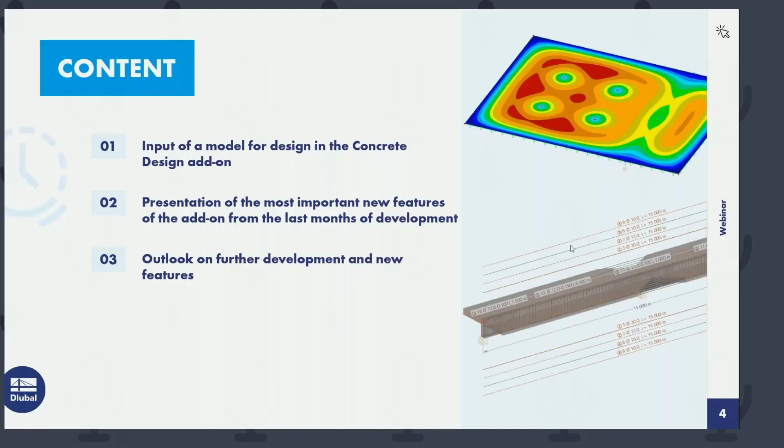Okay, thanks Andreas for the introduction. I will start with a short overview about the content of today's presentation. As I already mentioned, I will show you today new features in our concrete design add-on. Therefore, I will create a small structure in RFEM 6, and during the modeling process, I will tell you all the new features which we now have in our concrete design add-on.

Just a short overview about these new features. Mainly it's the automatic function for surface reinforcement. Then we have also a new function regarding determination of required reinforcement for members, which now includes serviceability limit state design. Then I will show you how to design with member representatives. We also have a new multi-edit option in the edit member dialog for members and member sets.

If we have entered a reinforcement and have a certain reinforcement layout inside our member, then we have a new function for printing graphics of this reinforcement template or proposal into the printout report. I will show this to you as well. And I will show you how to activate the design check for the shear joint in the add-on.

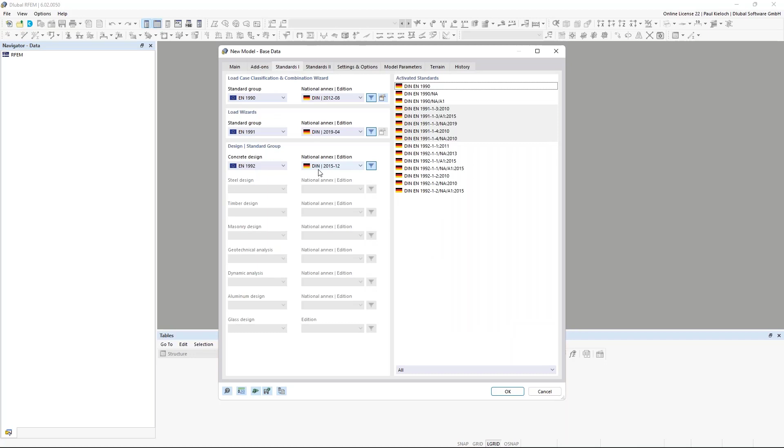What I would like to do today is start with a template. That has the benefit that there are some settings already stored in the template, and add-ons can be activated, or I could predefine national annexes and so on. So this is already set in this template, and I would give it the name 'webinar', and maybe 'English', so that's the English one. And I'll start this file here.

And as mentioned, due to the fact that I've used these templates, I have here a certain amount of materials, sections, thicknesses, and so on. And I will use them today for this presentation.

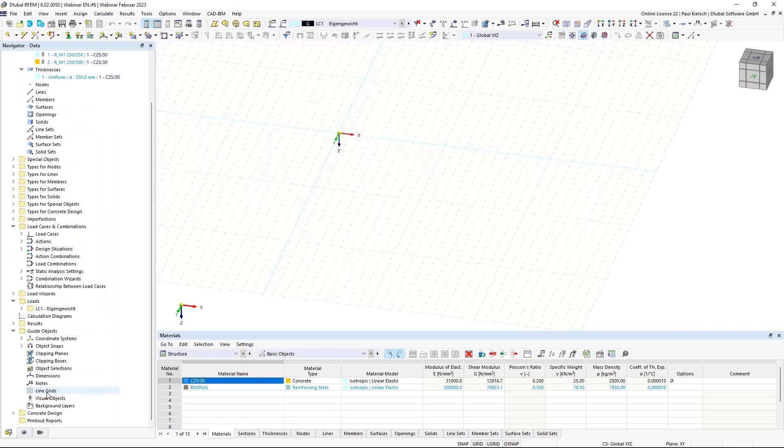So at first, I'm switching here to these guide objects, and there I will create a new line grid. And I will show you today also the labels here and the dimensions. Switch here over and enter the dimensions in X direction. In X direction, 5 meters and 4 spans. So it looks like this.

And in Y direction, the first span with 5 meters. Then I have 2.5 meters and 2 spans. And the last one is again 5 meters. So this is my line grid, which I would like to use today. It looks like this. And on this line grid, I will create my slab and my beams and columns and so on. So I can switch off the grid in the background, and then it's a little bit cleaner if you just see the line grids.

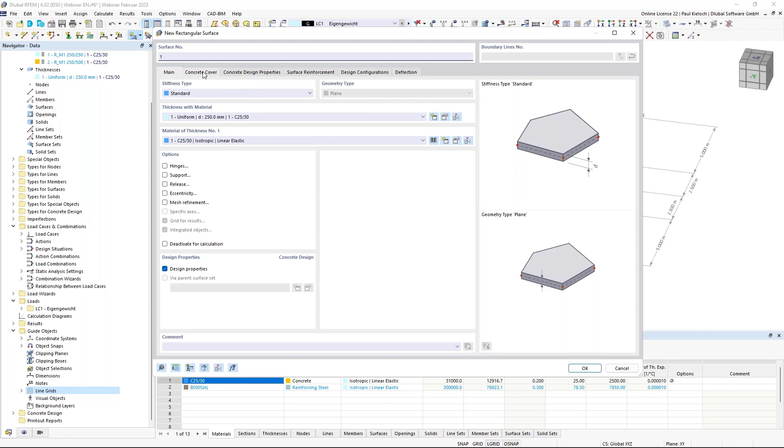Okay, the first topic is entering a surface for design. So I'm creating here a concrete surface with the thickness of 250 millimeter and this concrete here. And before I'm entering this surface, I can directly set the design properties for this slab. So concrete cover and the concrete durability class, I leave it as it is by default here in this example, XC1. The reinforcement direction is also default.

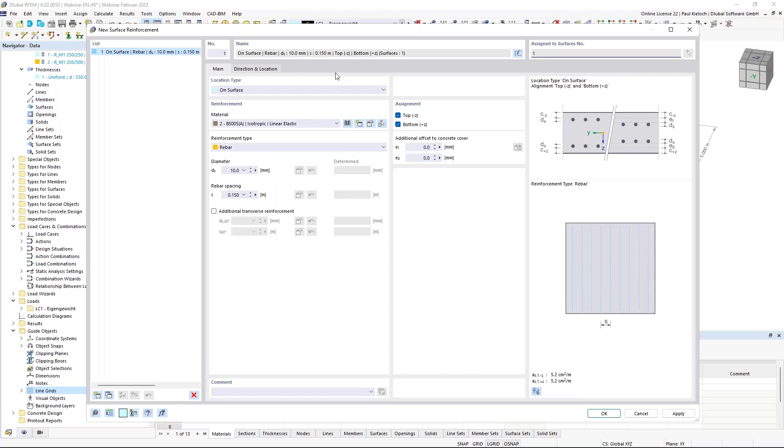And I will assign here a basic reinforcement for the whole slab with a diameter of 10 millimeter and a spacing of 15 centimeters in both directions. You see here already some changes in this dialog, and I will come back to these changes and modifications of this dialog in this latest version of RFEM 6 later after the first calculation. Okay, I can confirm this.

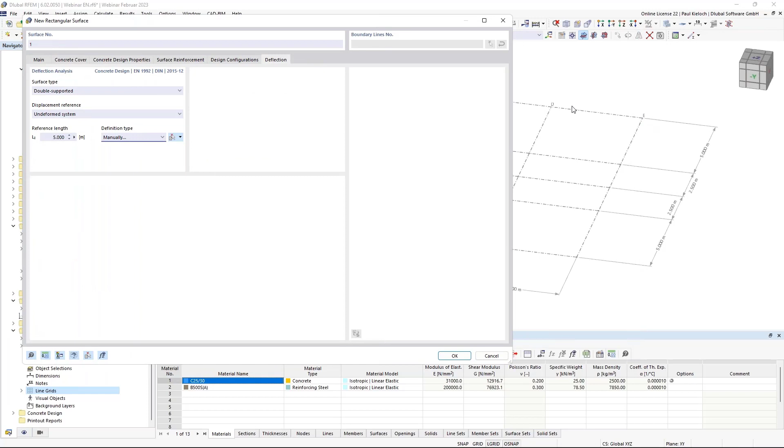The design configurations, I leave them also by default for this first attempt here, and I will also come back later to these design configurations. The last thing I'm changing here is the reference length for the deflection analysis. So I switch this to manually, and the reference length is now set to 5 meters. So I have 5 meters in X and Y direction, and I switch this manually to 5 meters. Confirm with OK, and then I create here my slab.

So by default, you see here also the rendering of the assigned reinforcement mesh. And what's new now in RFEM in the latest version is the description of the assigned reinforcement. In the latest version, we changed it a little bit. In the previous versions, there was a small arrow downwards and upwards. And if the arrow was downwards, then it was the reinforcement on the bottom side. And if it was upwards, then it was the reinforcement on the top side of the slab.

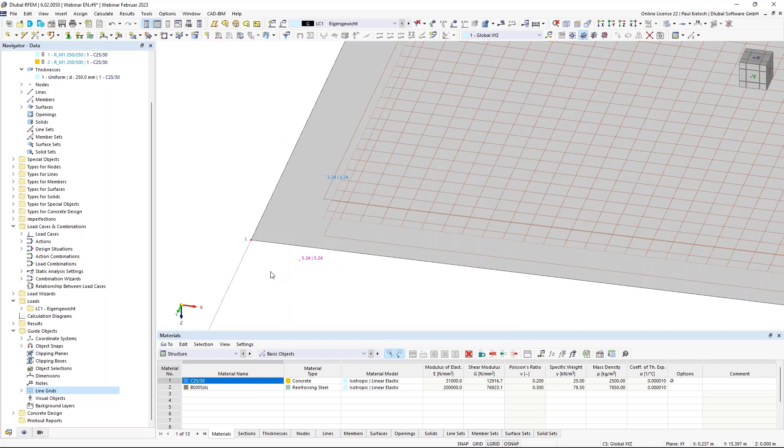That was now changed a little bit, and it's just a small line next to the text on the downside or on the upper side. So it's a small change here. What I would like to change is the number of decimal places for this example. Okay, and now I'm switching off this reinforcement just to have a cleaner look on the structure.

Okay, perfect. So the next topic is that I would like to enter a beam here or a rib member in this axis D. Therefore, I create a new member, switch the type here to rib, and I'm assigning this eccentric cross section on the positive Z side of the surface. That's a setting by default. And the used section should be this 250 by 500 millimeter section. Can confirm that, it is okay.

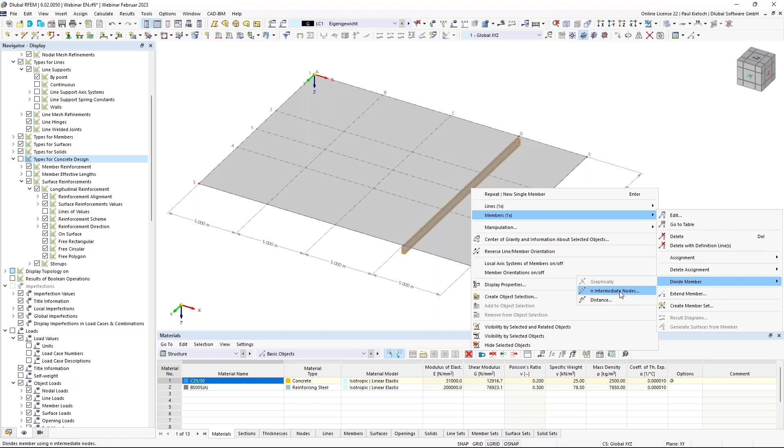And then I will assign this rib here in this axis. And here in axis 3, in this point in the middle of the beam, I would like to support this beam with a column, and therefore I'm dividing this member by one intermediate node. But what's new in RFEM 6 is that we can use this node type on member, and that has the benefit that our member is not divided in two parts, and that makes it a little bit easier for definition of reinforcement and so on.

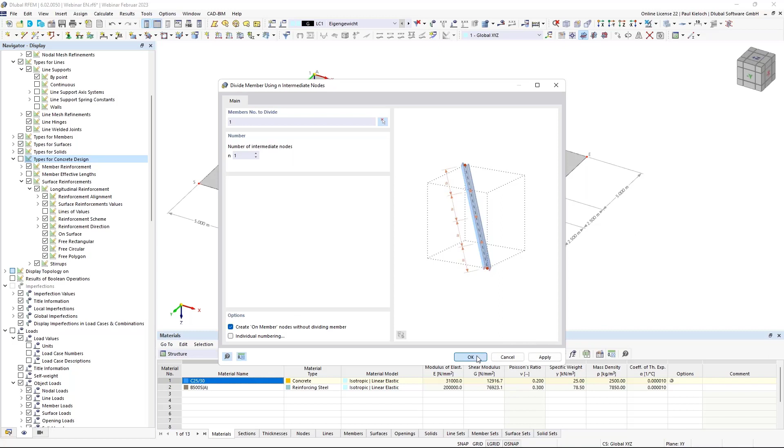So I will create a new node just with the type on member without dividing the member. Okay. And you see this here in the middle of the beam with a light blue node, and that's the new type for dividing members. Okay, the next step I would like to do is entering nodes for the column heads. So they are here in these points.

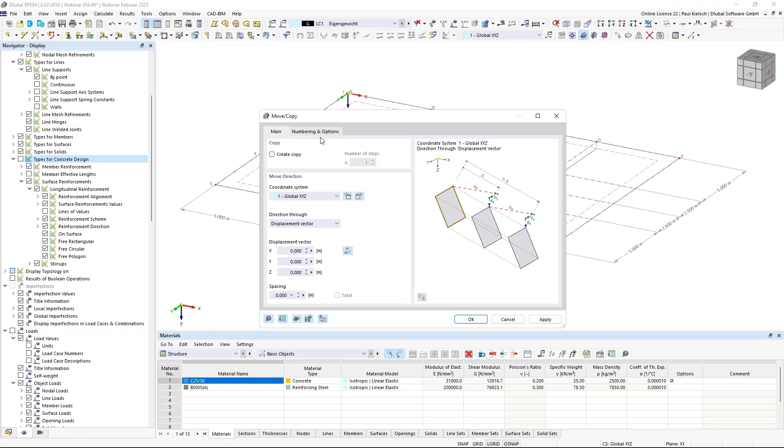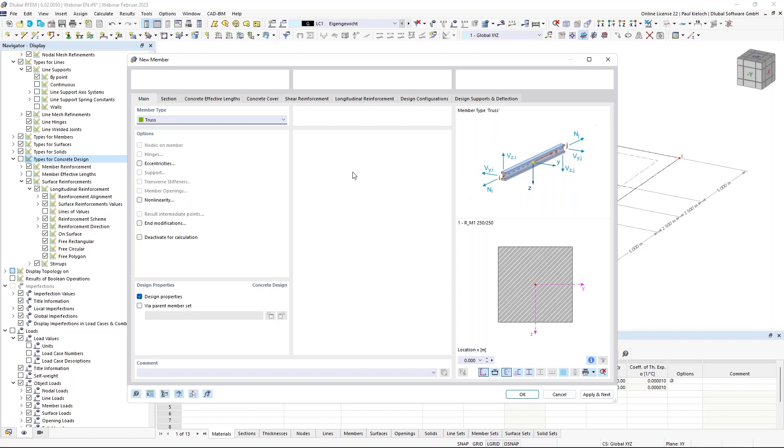Okay, and now I'm switching to the wireframe display model, and I can select these 5 nodes here, and then I will copy them with 3 meters in Z direction, and I can link these steps here and enter automatically a new member. Therefore, I will create a template. The columns should be hinged at the top end and the bottom end. So I'm switching here the member type to truss. The section is pre-selected in this case, like I would like also to use it, with 250 by 250 millimeters.

And I can now go through all the settings, all these design properties here, and entering, for example, the buckling lengths for the stability analysis. And in my example, it's a braced system. And I would like to use these effective length factors of 1 in both directions. Okay, next step would be the concrete covering. I leave it here in this example like it is.

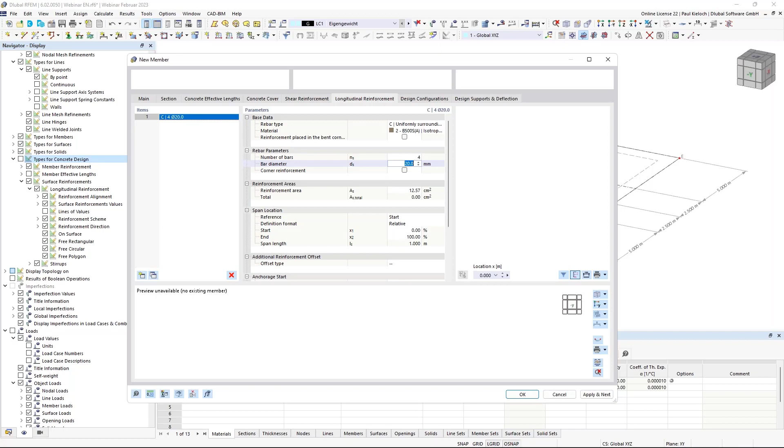Regarding the shear force, I would like to use shear links with a thickness or diameter of 10 millimeters and a spacing of 15 centimeters. And the longitudinal reinforcement should be uniform surrounding, 4 rebars and a diameter of 20 millimeters. Okay. Design configuration and design supports are not required to change here in this case. So I can confirm this. And then I'm using the template to create my columns. And they would look like this.

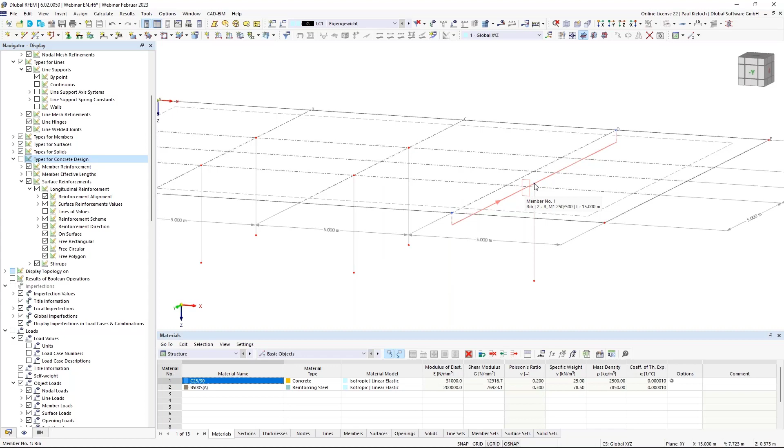I have just to take care because this node is here in the center of this eccentric beam. So the nodes at the bottom end are not in the same height. I will just do a double click here on this node and switch this to 3 meters. And then we have the same level here.

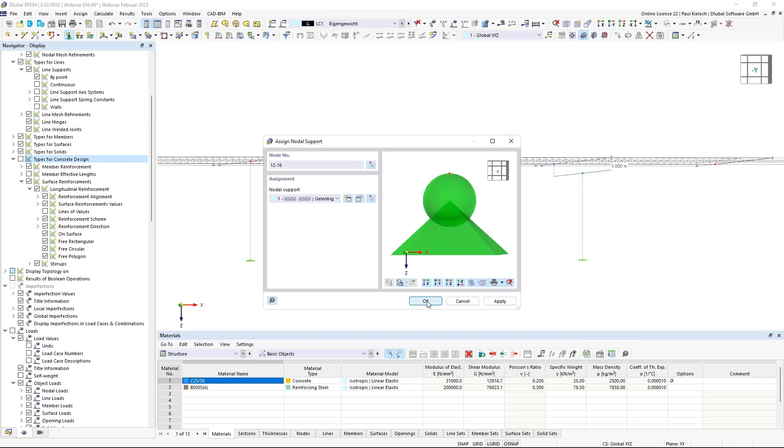Okay, then I can create the supports for these columns. Due to the fact that I have hinged member ends by this member type, I can create a new nodal support, and this is fixed or rigid in all directions. That would look like this in this example.

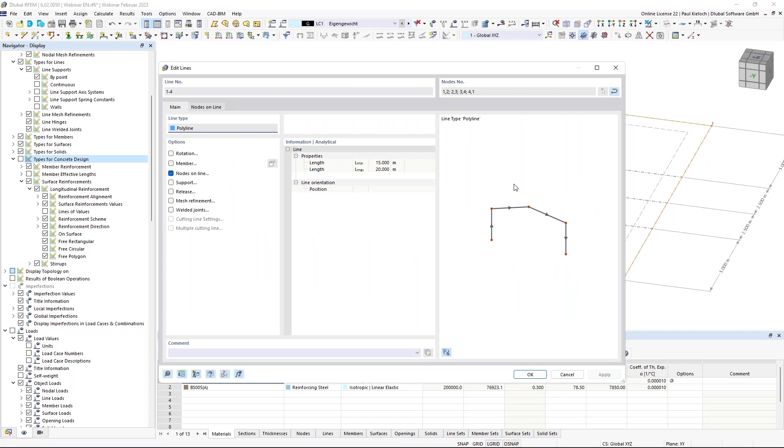Okay, then the next topic would be entering the support at the edge of the slab. So there I would like to consider walls. Therefore, we have also an option in RFEM 6, so I can select all the lines at the edge of the slab, opening them with a double click, and I will assign there a support, create a new one for them, and this one will be changed to local. And as soon as I switch this to local, I'm getting here a new option, stiffness via a fictive wall.

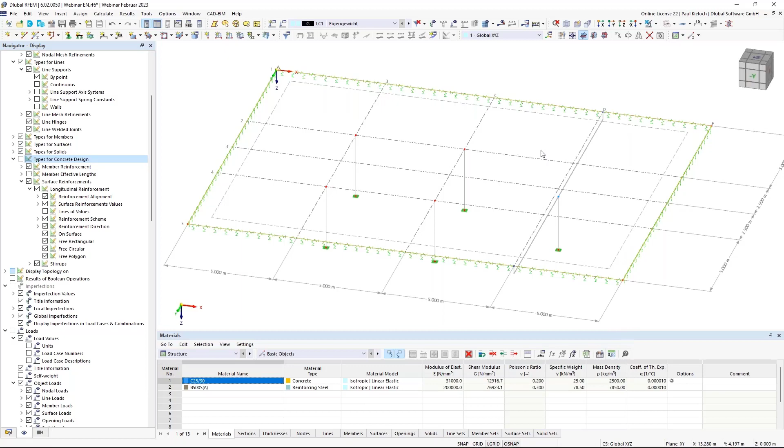And the wall thickness should be 25 centimeters and a height of 3 meters. And it is hinged at the wall head and base. So that's okay for me. Can confirm this. And then I have also the lines on the edge of the slab supported.

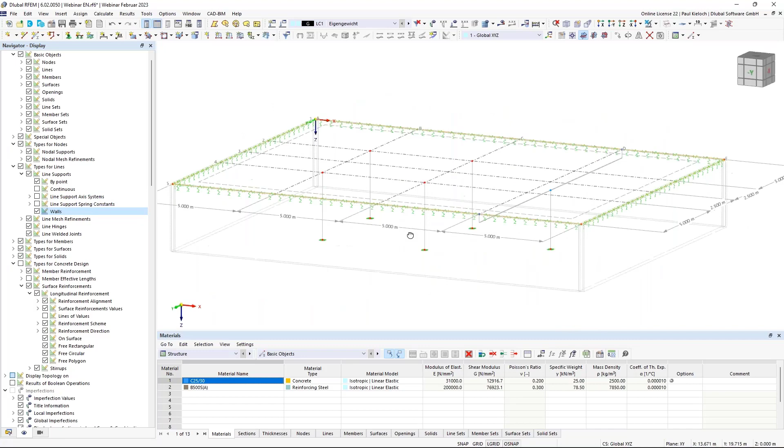If I would like to check this graphically in my system, then I can switch to the view or display navigator. And there under the line supports, I have the option to activate the walls. And then I would see the system also with these fictive walls here. Okay. That is basically my system now.

What I have not defined yet is the settings regarding the rib. Therefore, I'm opening the rib member once again. And I switch to this tab here with the rib. And in this table, you can basically assign the segment length for the determination of the effective width for the ribs. I will not go too much into detail for this part. We have shown this in our first webinar regarding concrete design in November 2021. And it's also part of the Eurocode 2 training where we get more into detail regarding this table.

I will just enter the values here to have a realistic effective width for this example. I'm using here this approach according to Eurocode 2. So I'm setting the segments here. Okay. Eurocode 2. Then, okay. User defined. It's the same on the other side. Basically, I have to do this because I'm using one member which is supported in the middle, and therefore the program needs the reference length. Okay.

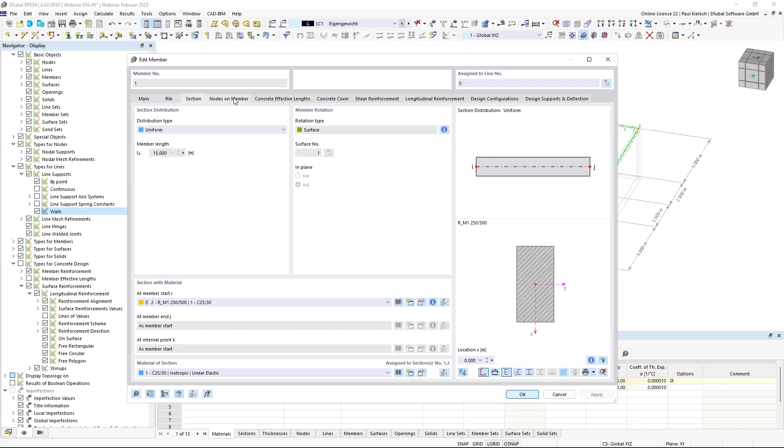So next is the section tab. There I do not have to do any changes. This is okay so far. Concrete covering also. So I can directly switch to the shear reinforcement. I would like to use here shear links, stirrups with a diameter of 10 millimeters and a spacing of 0.15 meters. And I will not use this for the whole length of the member, but I would like to have a span in the middle of the beam where I have 10 centimeter spacing between the stirrups.

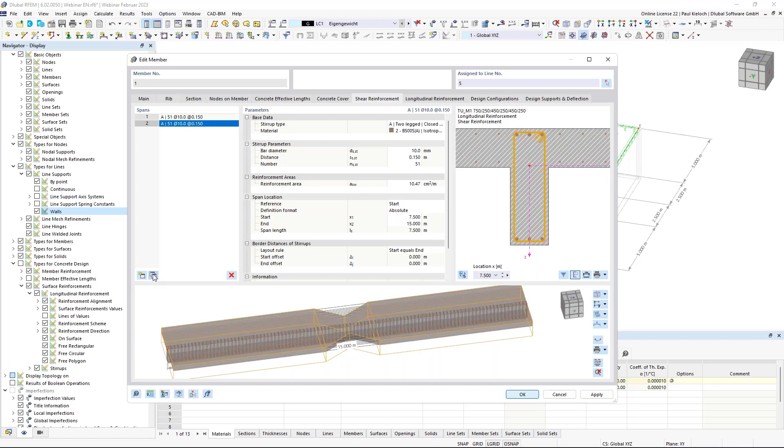So therefore I'm creating new spans. First switch here to absolute for the definition of the span length. Then I just click two times on this button. And then I'm getting these spans. If I zoom in a little bit, then you see that this middle span is now a little bit displaced and not in the middle of the member.

And I can change this here to 6 meters, and the second X location to 9 meters in my example. And then the span is in the middle of the beam. And I can change this to 0.1 meters or 10 centimeter spacing. Okay, that's my shear reinforcement I would like to use today. And then I'm switching to the longitudinal reinforcement.

By default, the reinforcement is using 3 rebars at the top side and on the bottom side. I will change it to 4 rebars. And then you find also here the rebars from the surface reinforcement, which is automatically also assigned to the flanges of the rib member. If you do not want to assign this surface reinforcement here, then you can switch it off via this button, but I will leave it on for this example.

Last thing I would like to add is an additional reinforcement on the sides of the web. So therefore I'm creating a new item. And this one is a uniform surrounding for my example here. And 6 rebars with a diameter of 12 millimeters. And then I have to enter an offset from the stirrup. From the top side, it's 150 millimeters, and on the bottom side, also 150 millimeters. And then it looks like this. Then I would consider these 3 rebars on each side of the web for the reinforcement.

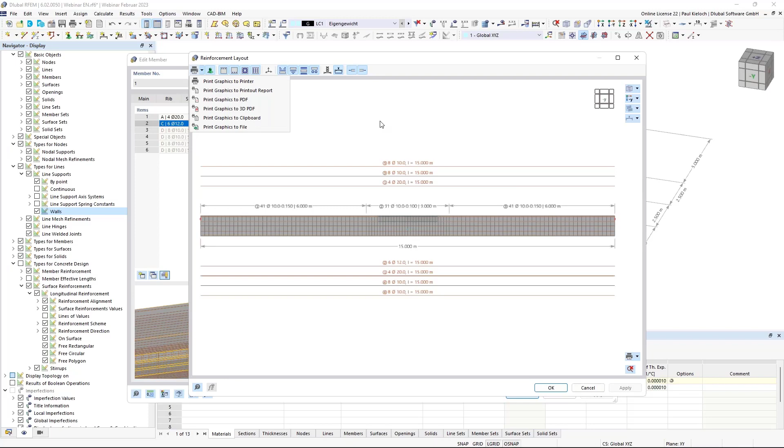Now, if you have entered the shear reinforcement or the longitudinal reinforcement like this, and you would like to print a graphic of this definition into the printout report, there is also a new feature. You can click on this button here, and then you get a new dialog called reinforcement layout. And in this dialog, we have a new button, a new function, and there you can print the graphic directly into, for example, the printout report or 3D PDF or a graphic as a file. So it's not a CAD file, it's a picture file. So you have this option, basically the same as for printing a regular graphic into the printout report. So that's also a new feature in the add-on.

Okay. Then I'm switching to the tab with the design configurations. There we have the ultimate configuration and the serviceability configuration. And in every configuration, we have one new feature. If I'm switching to the ultimate configuration, then you can see this shear joint, and that is what I have activated before in this tab with the rib.

So in general, the shear joint design check is always activated, and there you find further settings, for example, how the program determines the shear stress in the joint, or you can also activate design of flange connection on segmented cross section. So if you would like to perform these design checks, then you can check it on here in this ultimate configuration. So just keep in mind, this is always active, but you also have to take care whether you have activated the shear joint in the individual members.

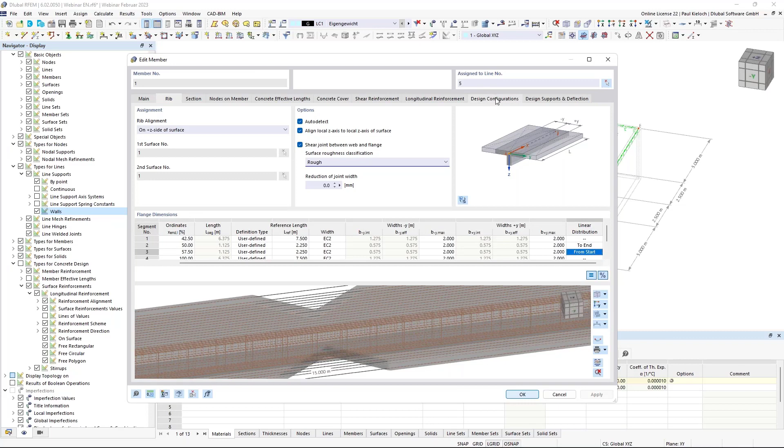The next new feature is inside the serviceability configuration. So inside the serviceability configuration for the members, you find a new option, determination of longitudinal reinforcement for members.

We have implemented this at the end of last year, and now it's possible, if you check this option, to consider also the parts from serviceability limit state in the result diagrams for the required reinforcement. In the older versions of RFEM 6, there was just the ultimate limit state considered in the diagrams for the required reinforcement. By activating these options, the diagram will also consider the parts from the serviceability limit state.

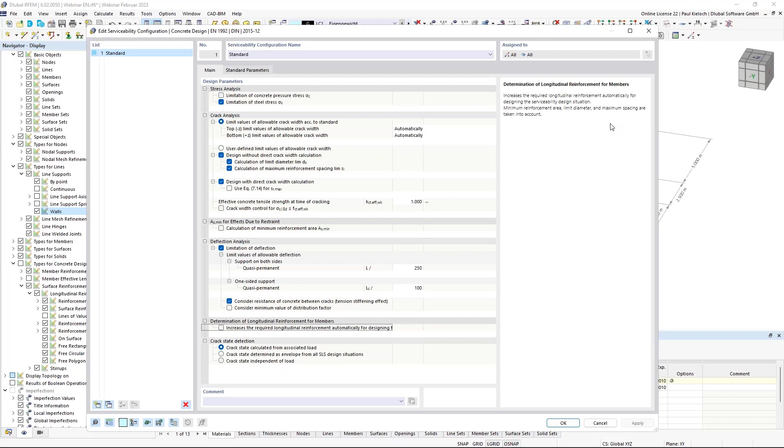If you click on this here, you get a little tooltip. There you see that currently this option considers the requirement for the minimum longitudinal reinforcement, the design check for the limit diameter, or the maximum spacing. The direct crack width calculation is currently not implemented. Okay. That's so far regarding the new features in the configurations.

One last topic I have to enter here is the design supports. In concrete design, we are checking the deflection in Z direction. So I'm switching over to the local Z axis. If I zoom out a little bit, you see that the member length is 15 meters. This dialog basically does not know that we have a column in the middle of the member. So the reference length would be by default the total member length, and for the deflection analysis that would not be okay in this case. So I have to enter design supports to consider this correctly.

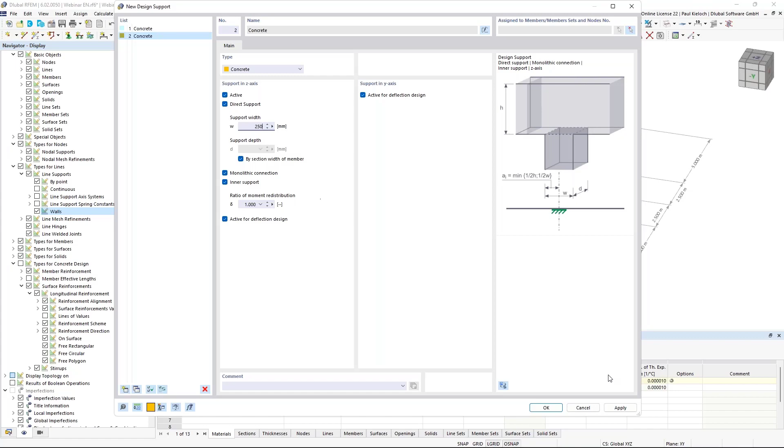I'm creating a new one, monolithical, with a width of 250 millimeters in my example. That will be assigned at the start and the end of the beam. And then we have also one here in the middle. That is an inner support, also 250. As soon as I have assigned these design supports to this internal node, you see that we have two spans, each with 7.5 meters. Okay.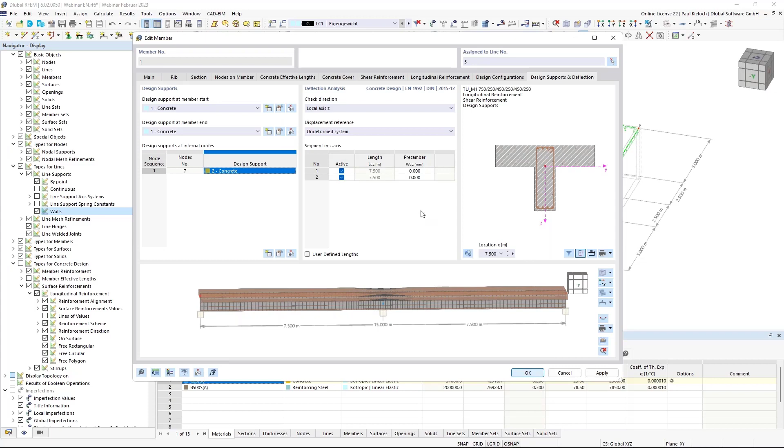We have defined our reinforcement for the member. The next topic I would like to enter with the structure is an FE mesh refinement. I would like to assign the FE mesh refinement on these nodes. So I'm selecting them, double click FE mesh refinement, and I create a new one that should be rectangle in my case, and I'm using an inner length of 7.5 centimeters.

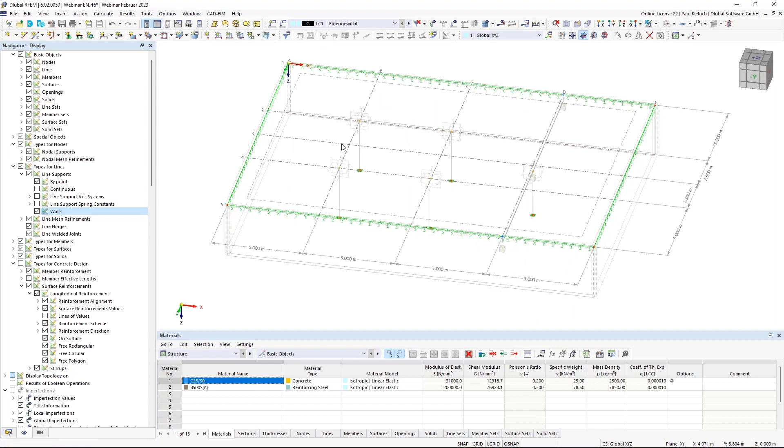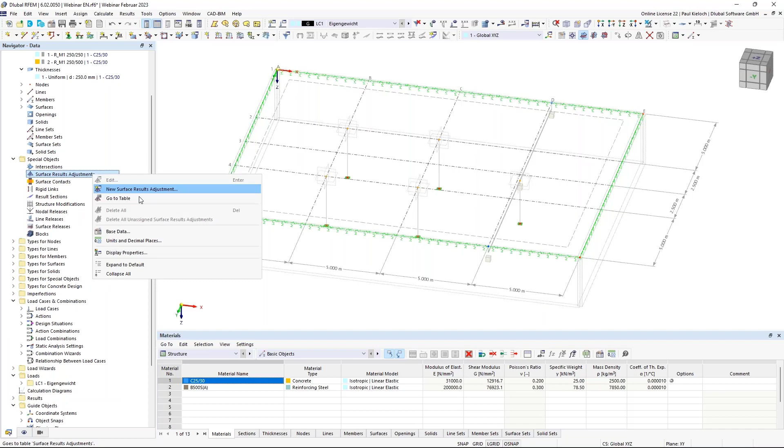Okay, so it looks like this, and now, if I have assigned a mesh refinement, I can also use in this situation a surface result adjustment to use average values of the surface internal forces. Therefore, I'm going to the special objects, and there you find the surface result adjustments. So I create a new one for surface 1. I will use dimensions in A and B direction with 0.75 meters, both directions.

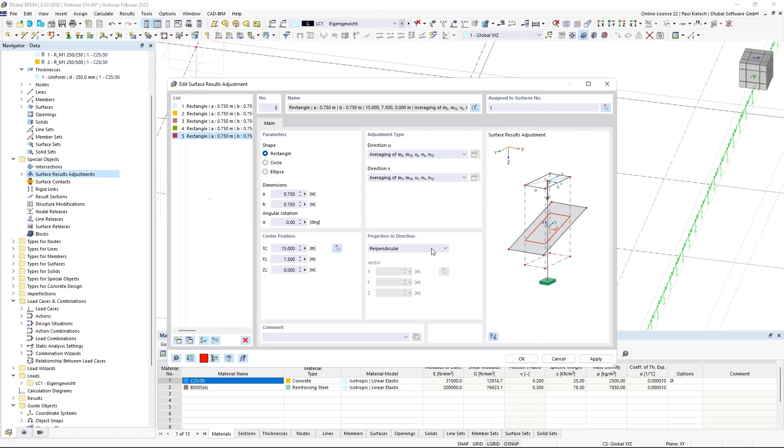With this button, I can set the first location. If I click on apply, I can show you where this is located now. I'm using this button for copying this assigned surface result adjustment. Then it's pretty easy to create them, just clicking on copy and switching the location. It goes like this. Here. Okay. And if I click on apply, you see them in my file.

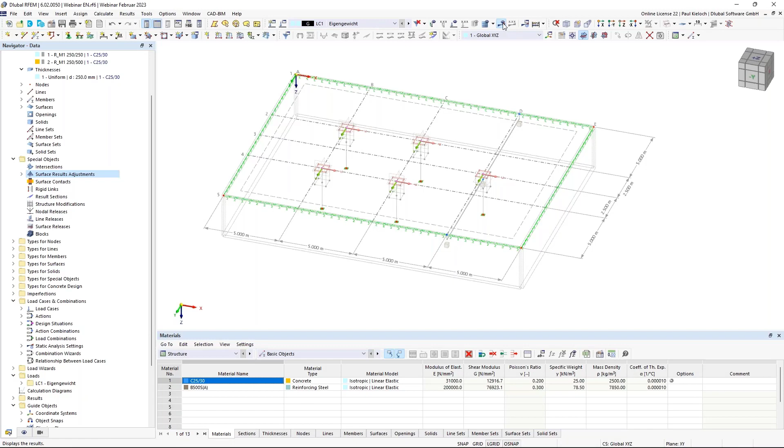The next step would be to enter the loading. Before I'm doing this, I just want to check whether my structure is correctly entered, whether there are maybe some problems regarding the FE mesh and so on. Therefore, I will calculate the first load case. And yeah, that looks okay. Everything seems to be connected properly. Now I can show you also, if I switch to the internal forces of the surfaces, how the surface result adjustments are working. So everything seems to work.

Now I can switch off the results and the FE mesh, and I can switch off the surface result adjustments, the result objects. I'm also switching off the type for nodes, the nodal mesh refinements, and then I have a cleaner look on the file. Okay. Now I can start with entering the load.

At first, I need some new load cases for this situation. My first load case will be the load case for the self-weight. I will call it just DL for dead load. Then I will create a new one, live load 1. I'm using this category. And I'm copying this. This one is live load 2, this one is live load 3, and this one is 4. Okay. Apply.

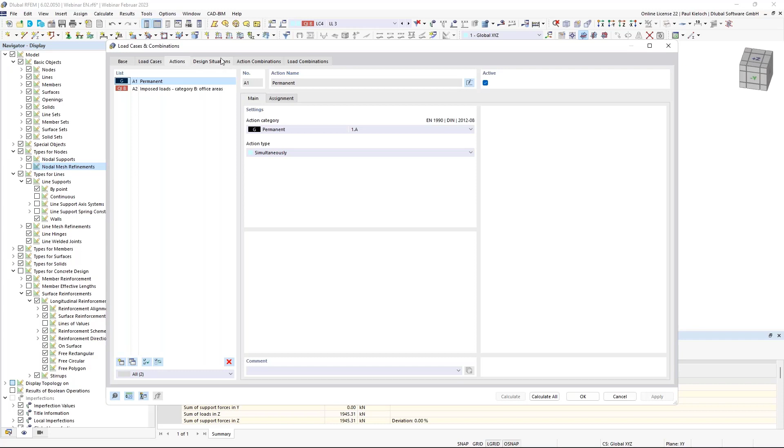The actions are okay in this example. I'm switching to the design situations. The design situation serviceability limit state frequent is not required here in my example, so I can delete this one, and I will do the design checks just with the characteristic and the quasi-permanent design situations.

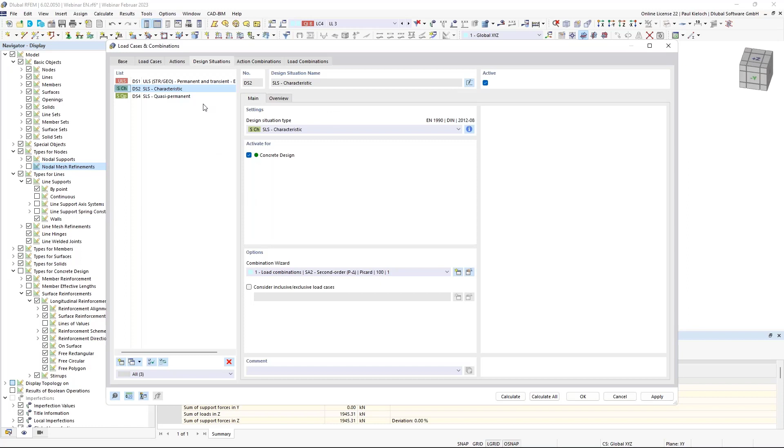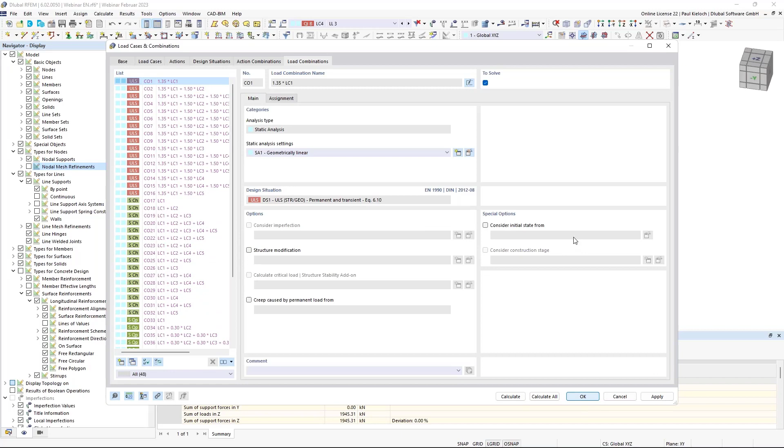One change is that I will create load combinations according to first order analysis, so I'm switching that here and switching to the action combinations, and then if I click on this tab, I will get the load combinations, and they are all according to first order analysis. Okay, those are my load combinations for this example, and now I can start filling these load cases with loads.

So the first load case, dead load, will have 1.5 kilonewton per square meter on surface number 1, and it looks like this.

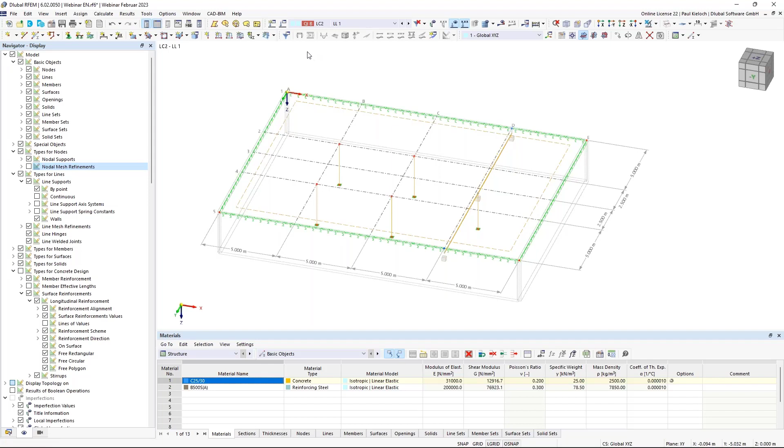Here in the second load case, it's now a little bit more problematic. For the live load, I would like to use a loading pattern according to this grid, to these fields here. Currently, we do not have a load wizard for this, so I will create the loading pattern by using surface loads, rectangular loads, and polygon loads. For this situation, I'm in my load case 2, and I will create a rectangular load on surface number 1.

The load value here in my example is 3.8 kilonewton per square meter, and the location is from that point to that point. And I can click on apply next. And then I see the load in this field. And now I'm just entering the surface and switching the location once again. Looks like this. Apply next. 1 and here on this point.

And okay. So in this situation and in this situation, it's a little bit more complicated, so I cannot use the rectangle one. I will use the polygon load here. It's also assigned to surface number 1. And then from this point to that one, and that one, confirm with OK. The load value is also 3.8.

OK, and then I need this function once again. And now from here to these nodes. OK. And it looks like this. So now I switch to the next load case. And I'm starting once again with the rectangle. 3.8. Here. Apply next. Here. Apply next.

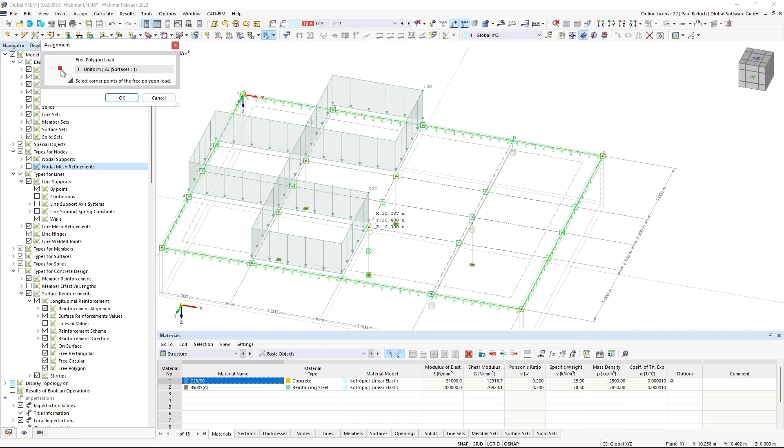Here and OK. And then I'm switching to this polygon load here, from that point to that and that point. Okay. 3.8. Okay.

For the live load 3, I'm using the rectangle again. Surface number 1, 3.8 kilonewton per square meter. And it's from here to here. And then I can click here, apply next. And then I can switch the load case in this dialog, assign it to surface number 1 again, and switch the nodes. And then it would look like this.

If I'm entering these loads like this, then I always start a short calculation. So I'm going to calculate. I'm just selecting the load cases where I have assigned the loads. Start the calculation.

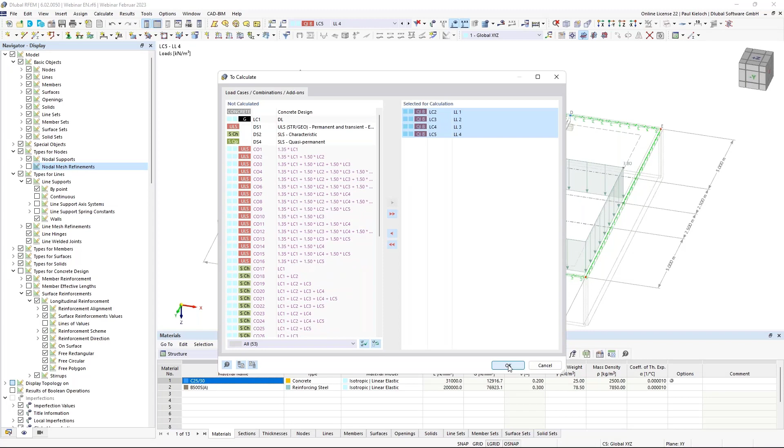And now what I'm always doing is switching on the load distribution here in RFEM. I'm switching off the load itself, but just the 2D elements. So now I can switch to all load cases and just check whether the loads were applied correctly. So I have here my 3.8 kilonewton per square meter, so I can directly control the loading pattern. Okay, that looks okay so far.

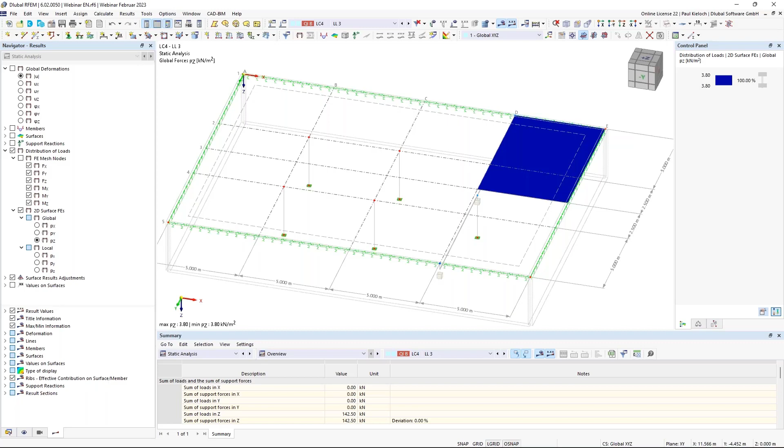So we have entered our combinations and also our loading. And now I can basically start with the first calculation in the concrete design add-on. Therefore, I'm switching in the table to the add-on concrete design, and by default all objects are activated, but I will do the first attempt just for surface number 1. And then I'm starting the calculation.

It takes a moment, and then the program will show us the design checks for surface number 1, and we can check the design ratios first for the ultimate limit state. And then we can check where we have to enter additional reinforcement.

Okay, so basically if you do surface design, this dialog will in most cases look like this or similar. You have several points where it's not designable, or you have not designable nodes. Therefore, I would switch over here to the design checks on surfaces.

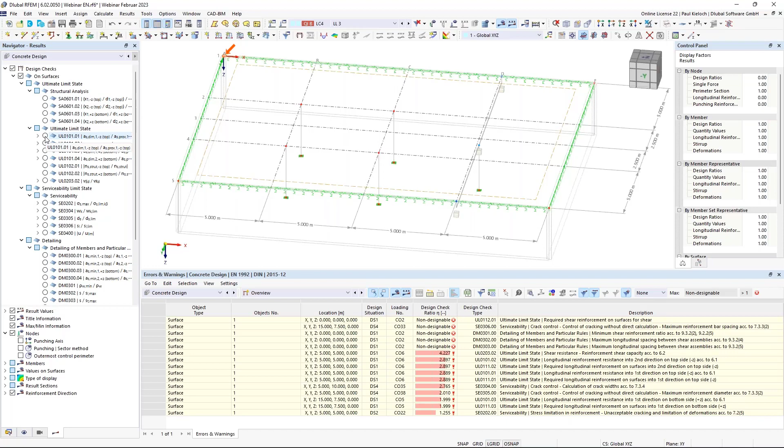In my case, I would like to check it, for example, for the top side in direction 1. And then it looks like this, that especially over the columns, I have elements where my design checks are not fulfilled.

So here you see it, it's a range from 1 to almost 3 times not fulfilled design checks. That's the same also in the other direction. And on the bottom side, it looks a little bit better, but there's also a small problem here in this area. So if I have this result diagram in this way, then I can also switch to the reinforcement.

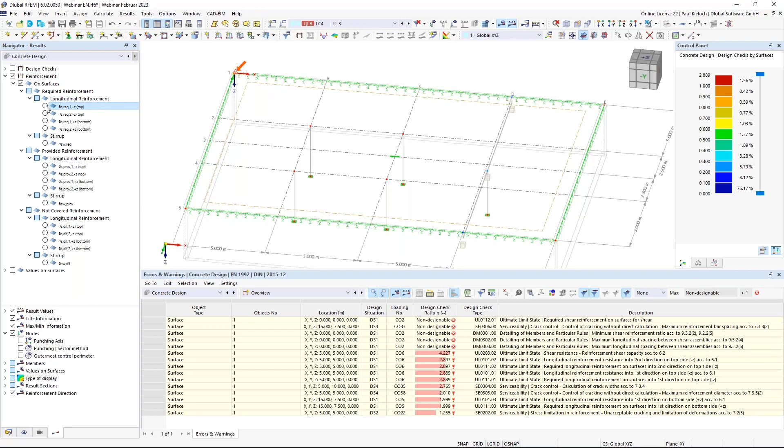On the reinforcement, I can switch on the required longitudinal reinforcement on the top side. And then I see these values here. And one more informative...

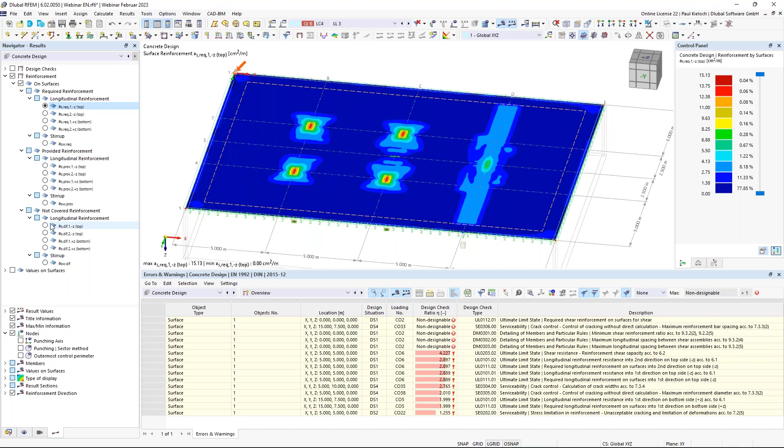graphic would maybe be switching over to not covered reinforcement. So we have assigned here a basic reinforcement of 5.24 square centimeters per meter, and now it would be interesting where I have to assign additional reinforcement, and therefore I'm switching over to this not covered reinforcement.

And that is, like I said before, basically over the columns, and here in the middle of the beam there's also one area where I would need additional reinforcement.

Now if I'm entering additional reinforcements, there we have a new feature, and therefore I'm switching here in the data navigator to the types for concrete design, surface reinforcement, and I create a new surface reinforcement.

This new surface reinforcement will be also assigned to surface number 1, but now not on the total surface, but it will be changed here in my case to a free rectangular location type.

The first additional reinforcement, I will assign them just on the top side, and I will enter here an additional offset of 20 millimeters here.

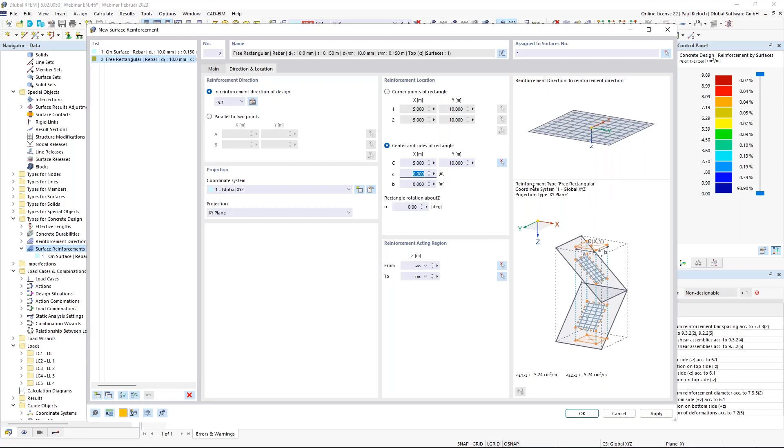And I will use this additional reinforcement in both directions. And the location will be here, for example, on this point. And the dimensions are 2 by 2 meters.

And just clicking here on apply. No, not yet, so we'll enter it once again. Millimeters, okay. On this point, and 2 by 2 meters, okay.

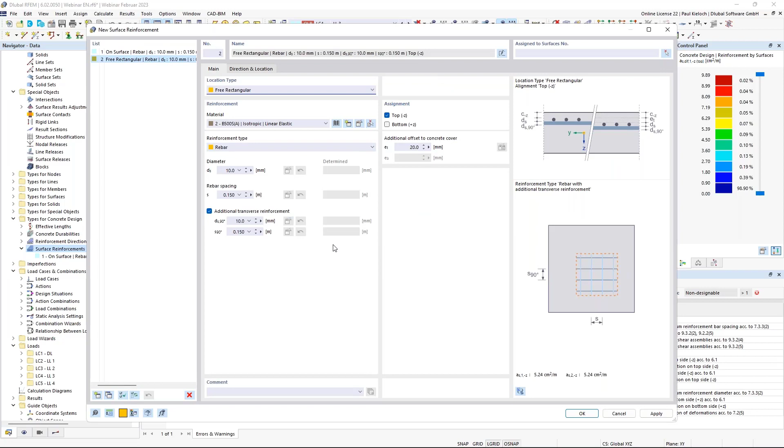So as I said before, there is now a new option here regarding determined values, and buttons to overtake a determined value. These buttons are required for a new function in RFEM 6.

And you can find this new function if you click here on this button, once in the diameter, it's called auto, and also in the spacing. So what you can do here now is you can assign an additional reinforcement, which is covering automatically the not covered reinforcement from the first calculation.

So in my case, I'm needing here an additional reinforcement of around about 10 square centimeters per meter. And I can say that I would like to use rebars in both directions with 12 millimeters.

And the spacing between the rebars should be determined automatically. So if I'm selecting auto, then the program shows me these additional parameters, and there's the minimum spacing and the maximum spacing defined here. So I will use 10 centimeters as minimum and 30 as maximum, and confirming this with OK. It's the same in this other direction.

OK, I click on apply. So the next is that I'm copying this one here. Copy, and I just...

change the location. So that is basically the same like I've done it before with the surface result adjustments. This one, and OK. And the last one will be here.

And the last one is just in direction 1. I will use 10 millimeters here, but this time on the top and bottom side, this way. Also auto, OK, I can click on OK.

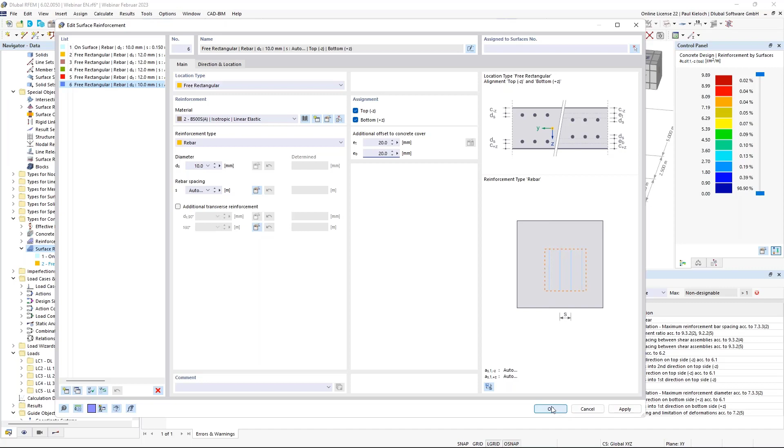And it looks like this. So now I just go to concrete design. OK, so results, just delete the results here.

And now, due to the definition of this additional reinforcement here, I've just forgotten to assign this to surface number 1. That was the problem. Okay, now it's assigned, and if I switch the display setting on, then you see here on these slabs this additional reinforcement.

It looks like this. And due to the fact that we now in this state do not know which value there is assigned, we have just the info that it's auto reinforcement. So with these settings, I can start the calculation once again.

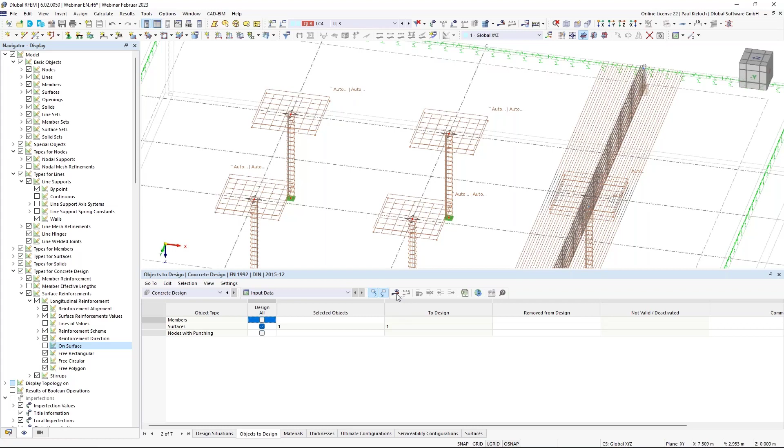Now the program will cover all the not-covered reinforcement automatically, and the result will be that I'm getting info about the spacing I have to use if I assign, for example, a diameter of 12 millimeter or 10 millimeter and so on. One point I haven't mentioned yet is that you cannot assign the auto function for diameter and spacing at the same time, so that is not possible. You have to use either the automatic function for the diameter or the spacing.

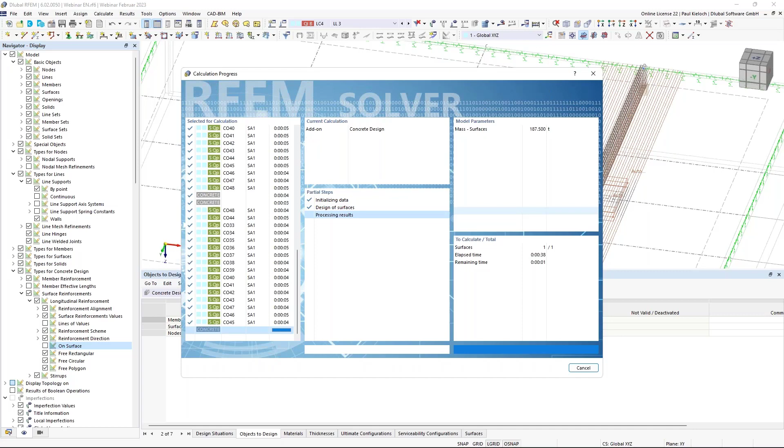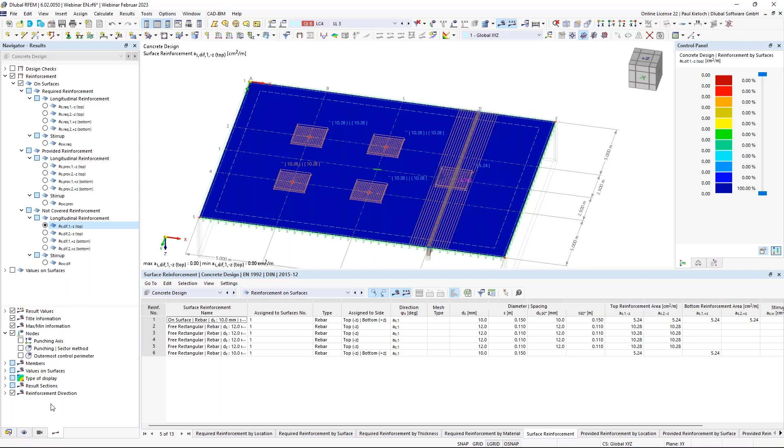So if I open the dialog for edit reinforcement once again, you have two options basically. One would be that before you start the auto process, you can switch the increment in this additional parameter settings so that you, for example, use just 5 centimeters. That would be an option.

But you can also use this determined value here and overtake it in this cell, and then you can edit it. So I could overtake this value and modify it, for example, to 10 centimeters. That's one option using this button here.

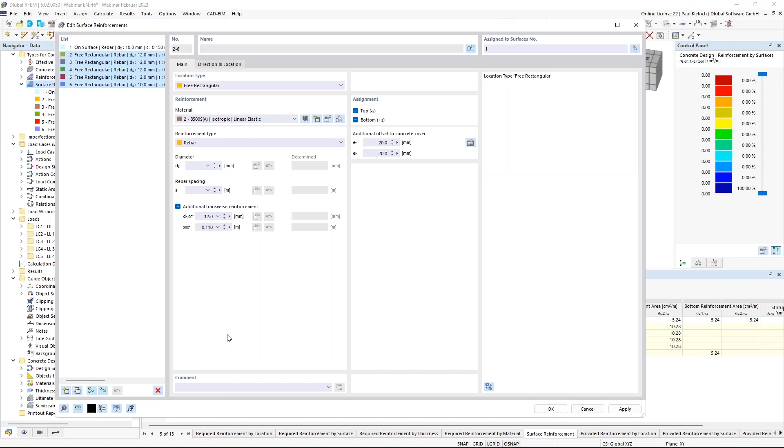It's also possible to select all items which have this auto setting, and then use the same button at the bottom end, and the program uses the automatically determined values.

I can assign this one, and I will delete the values just for concrete design. Before starting the next calculation process, I will continue with the columns.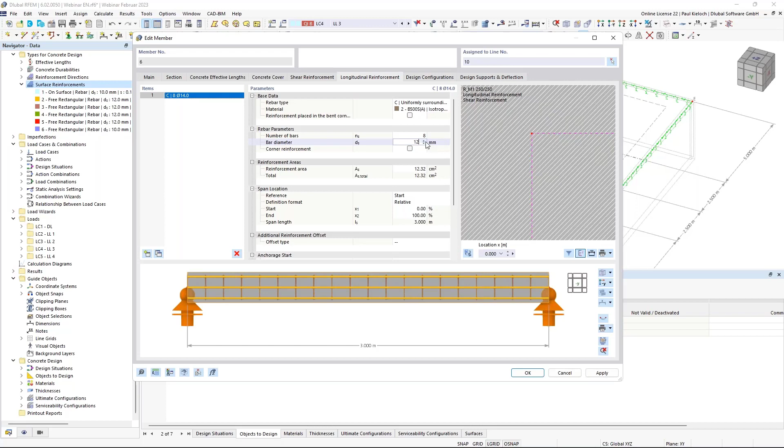So for the columns, I will show you two new features. One would be regarding the multi-edit. In case you have a member with a different type of reinforcement layout—let's say, for example, in this member I would assign 8 rebars with a diameter of 12 millimeter—it would look like this. So here we have our 4 rebars with 14, and here 8 with 12 millimeters.

In the previous versions, we had the limitation that if you had different reinforcement proposals, it was not possible to make changes in the shear reinforcement and longitudinal reinforcement. That is also solved now, this little downside, because now it's also possible to show members with different settings.

So you see, for example, that we have the same rebar type running uniformly, but here we have a different number of bars, from 4 to 8, and also different diameter. In this dialogue, basically a certain member of the selection is displayed. If you would like to see another member, you can switch with this option between the members, and then you would see the rendering for the selected member.

What I can now do with this new function is put several different members into one selection and change the reinforcement for all these members in one step. So I would set it back to 4 rebars with 14 millimeters, and then it's the same for both, and I will get the name or description of the item back too, because the amount of rebars and the diameter are clear.

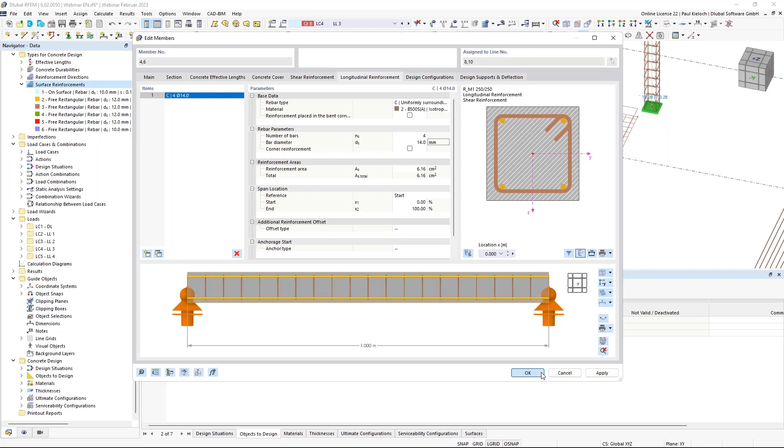That's basically regarding the multi-edit. You have this multi-edit for the shear reinforcement and also for the longitudinal reinforcement. In my case, it's also the same length, but it's also possible to use this multi-edit if the lengths of the members differ.

So the next feature I would like to show you is using member representatives for the design in the concrete design add-on. Therefore, I will create types of columns. Let's say you have a lot of columns in your structure and you would do the calculation with different types. Then you can create, for example, here

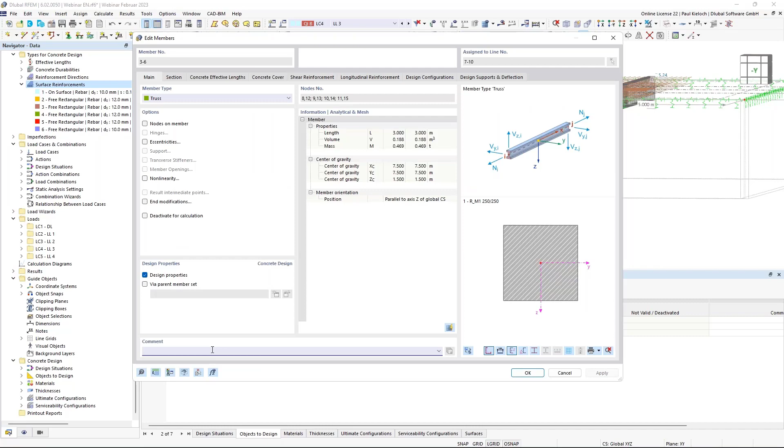or not create, but enter a comment. Let's say in my case, type 1 column, type 1, this one. And for the other 4, I would add a comment and say type 2, for example.

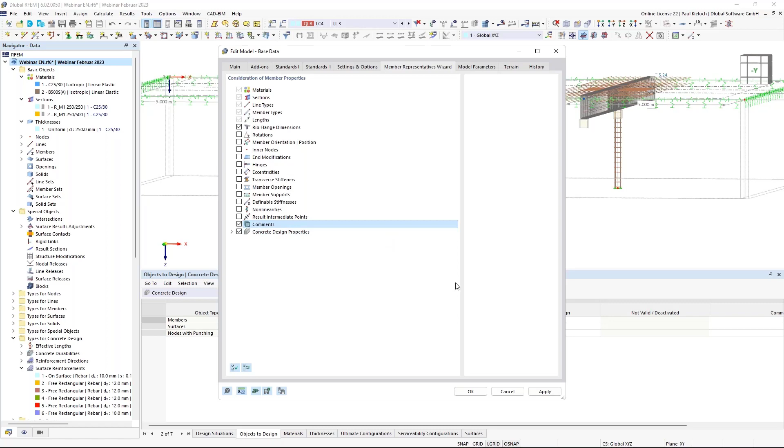The next step is to activate the member representatives in the base data dialog. If you activate this member representative wizard, you also have the option to consider these comments here, so I'm activating them. Clicking OK gives me these member representatives - one with blue bubbles and one with green.

I can do a double click on it and directly switch the name in the type 1 column, apply, and this one to type 2. It's not required to change it, but it may help afterwards in documentation, since you can create printout reports and tables including the name, making it easier to document results for the individual types.

Now you see that when working with these member representatives, you can also assign shear reinforcement, longitudinal reinforcement, and in general set all design properties using the member representatives. I'm confirming this with OK, and now you see in the input data table these member representatives.

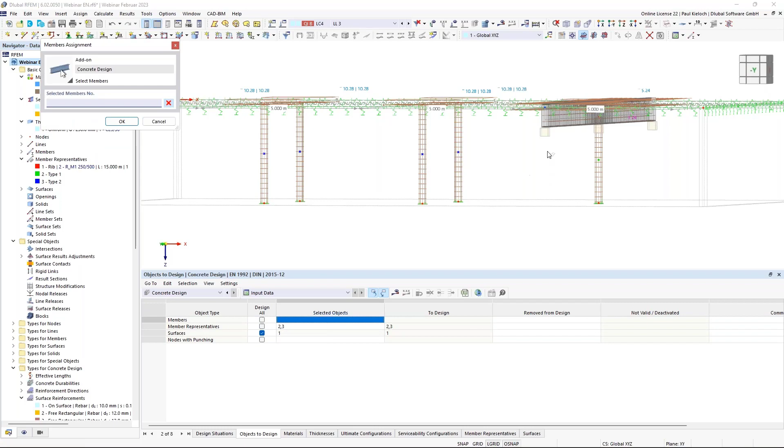In my example, I'd like to do the design just for the type 2 and type 1 column. I'll do the design for this member. OK, then I'll activate all my punching points here in the table, but I also have to activate them in the structure - this one, and this one.

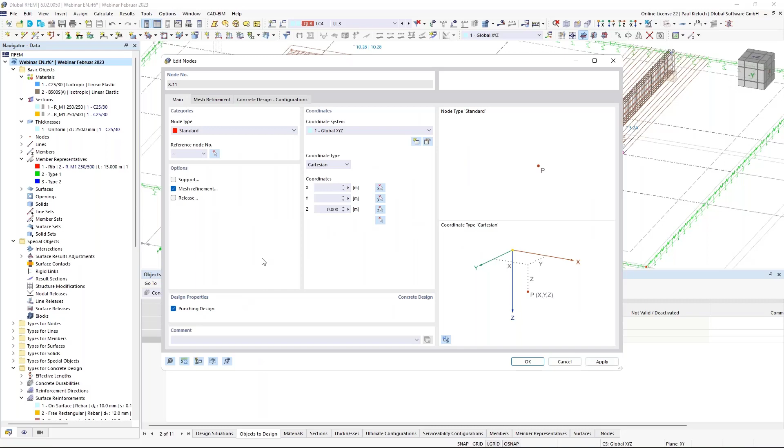It's for nodes, and I'll activate the punching design check. In the configuration for punching, I'm switching this option to use the provided longitudinal reinforcement. As I said before, I used this auto function to create additional reinforcement, and now I'll also use this provided additional longitudinal reinforcement for determining the punching shear capacity.

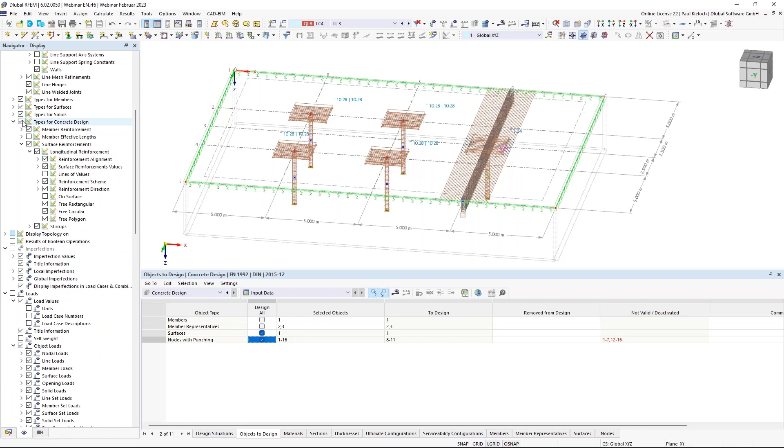That's basically all. I can now save this file, and then start the calculation for the whole structure, but I'll switch off the types for concrete design first, then start the calculation process. In the meantime, I'm switching over to the presentation.

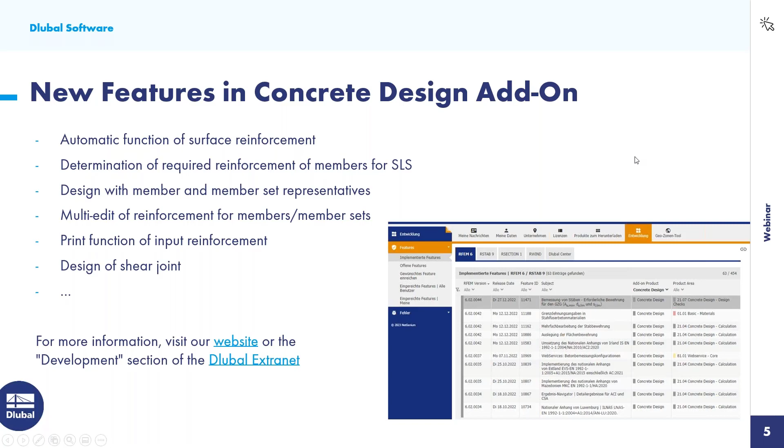While the program calculates, I'll give you a brief overview of upcoming new features in our add-on for concrete design in RFEM 6. This is a random list, so it doesn't mean the first mentioned feature will be released first - it's just randomly listed.

The same determination of required reinforcement, like I've shown for members, with the option in the SLS configuration - we're also developing the same option for surfaces. Nonlinear calculation is also in development for ultimate limit state and serviceability limit state for slabs and members or beams. One upcoming feature is the merge of shear and punching shear resistance and reinforcement design checks into one graphic. Then, of course, fire resistance design checks, and seismic design of concrete components according to Eurocode 8.

We're developing an interface between our section software and RFEM 6, to have the option to reinforce general massive cross-sections, not just in terms of longitudinal reinforcement but also regarding stirrups. So you'll be able to create free-form stirrups in our section software, then import this cross-section to RFEM 6 and do the design check there.

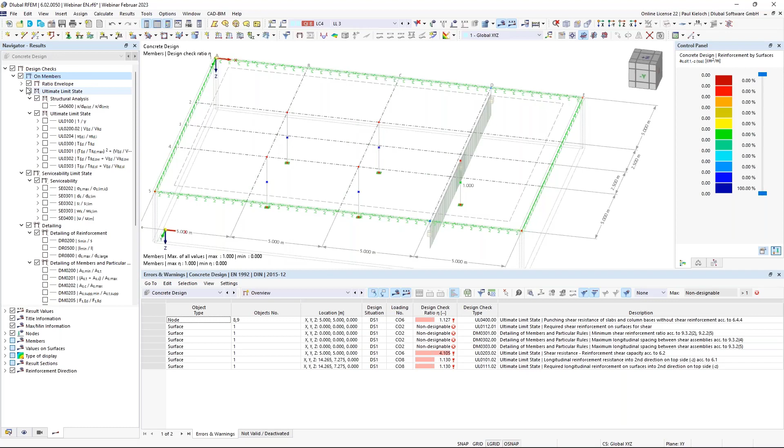I'll switch back over to RFEM now, and we can do a quick overview of the results, because there we also have some new features - just one for the members. So I've done the design on this member here.

Just for this rib, I've just used one member here, and this is this rib member. For example, if I'm switching over here to this one and showing you just the design check for the shear force, then since some version we have extended the amount of intermediate results, so it's, I would say, much more detailed now than in the previous versions. You just have to click on this small arrow here, and then you get more detailed results.

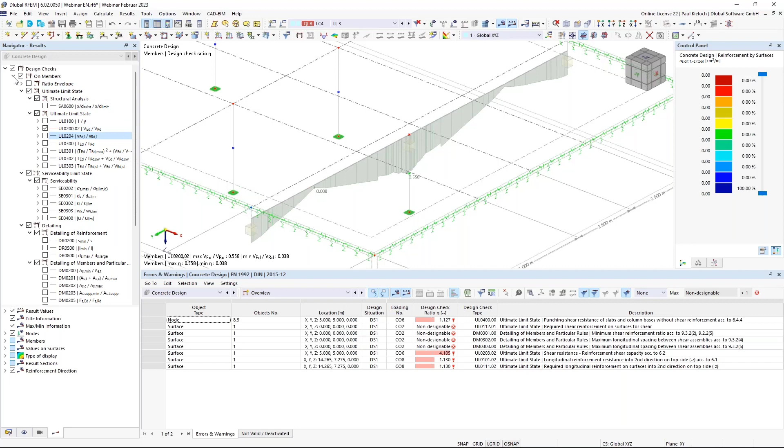Here you see the results for the new features regarding the shear joint. So that is all listed in the design checks for the members. Then if I switch over to the member representatives, it's basically the same, but what I would like to show you is if you do the design here in the add-on with the member representatives, then you will get the same result for the individual member representative. So I have here 4 columns, and the 4 columns have the same results.

If you would like the individual results for the individual columns, then you can use, as I said before, the representative for input, and you then have to design the individual members, not the member representatives. Okay, then regarding the surfaces, we checked the results before.

I would like to show you one last new feature regarding the punching, because in the latest version we now also implemented the load increasing factor beta, which is now also possible to activate here in this detailed result. So under the design checks on nodes, you find this load increasing factor beta. If I'm switching over to the reinforcement, then I'm switching to the reinforcement on nodes.

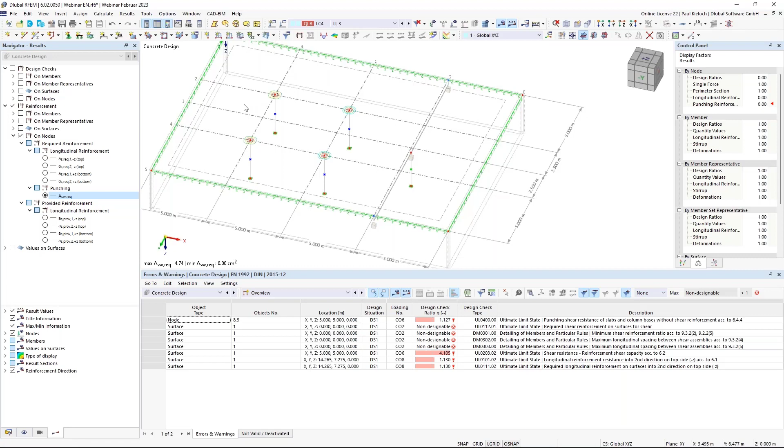If you have activated the required punching reinforcement here, then you can click on isolines, and by activating values on surfaces, you will get the individual amount of required punching reinforcement in the individual perimeters. And now, and that's the last feature I would like to show you, you have the option in the nodes to also display the outermost control perimeter.

And that is also connected to the feature which I mentioned before in the presentation, that we plan to combine the results of the design check for shear force in the slab and also punching shear above these columns. Okay, those are basically the mentioned new features in RFEM 6 and its add-on Concrete Design. And with that, I would hand the screen back over to Andreas.

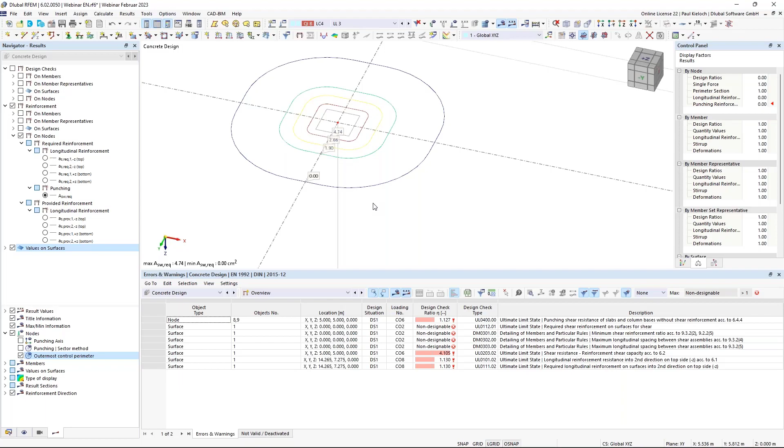Okay, Paul, thank you for this nice presentation and for this good overview of the current state of concrete design in our program and the outlook for the future. We promise to develop our programs continuously in the future. You will see it in the next webinar, approximately in half a year. It's already planned.